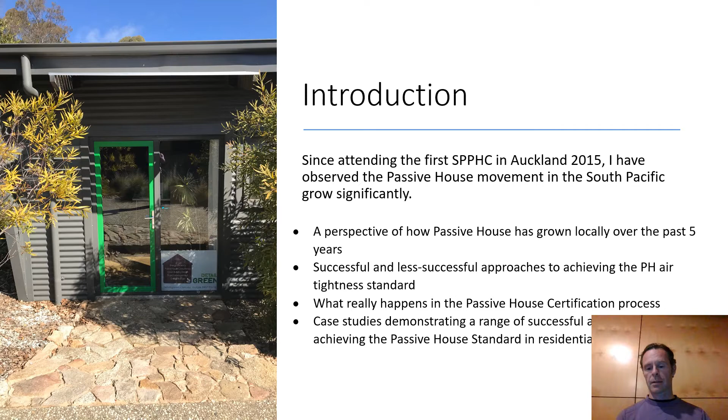What really happens in residential passive house certification, and that's really just a very brief overview because a lot of people are a little bit unclear on what we do. And also, I'm going to give you some case studies of some good projects we've been involved in, ones that you may not have heard about through this conference or other media so far.

So 2015, what were we talking about? Back then there were only the first few projects in Australia. The first couple that I was involved in, the picture here is of one in Yarra Glen out of Melbourne. Really, we were considering the feasibility. What does a passive house look like in the South Pacific in our climate? How do we deal with bushfires?

How do we build an airtight building? It was such a big challenge for us back then. We're getting much better at it these days. And availability of products, airtight windows, heat recovery ventilation systems that are certified. Does it all really work, and what does that mean for Australia? So what were we talking about back then?

In 2016, this is a slide from my presentation at the 2016 conference. It was about being involved in what was potentially going to be Australia's first Passive House Plus. It ended up being Australia's second Passive House Plus. The location is about 4 hours west of Brisbane on the New South Wales-Queensland border, on the western side of the Great Divide.

I worked in conjunction with Sustainable Building Design on this project. Very simple building, very particular client, wanted an off-grid and fossil fuel-free house. You can see from the PHPP some really impressive numbers there, which is great for an off-grid house. Very minimal heating and cooling required.

So in 2020, how is it going? The picture at the top there shows us the Springdale project and how it looks finished. You can see the PV array in the back corner there. So generally, it's functioning quite well, although we've had a bit of contact over the last 4 years with the owners. There's a couple of things.

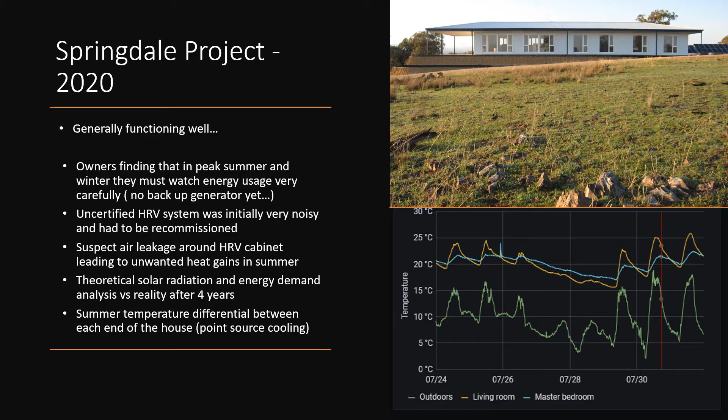So a few numbers for you on growth of passive house in Australia. 2015, when I was doing my first few projects, all our projects were using building certifiers from overseas, from Ireland, Canada, and the Passive House Institute in Germany. 2016, Claire and Jason and I all did the building certifiers course together, and I picked up one project that year as a building certifier as it commenced.

In 2017, the Monash commercial building in Melbourne commenced, and I had 9 certifications on the books by the end of 2017. 2018, I finished my first certification project, and we picked up 13 new projects that year. So things are starting to pick up. In 2019, there's really steady growth. The Fern was completed. Gillies Hall, Monash University also completed. We were at 17 new projects for certification.

This is in 2020, we have on the books at the end of August 23 new projects on the go, which is fantastic. We're really starting to see a rise of EnerPHit projects. Great to see some more of those finished. At the moment, we have 46 projects under certification, 9 completed, and another 5 projects where I've been working as a passive house designer. So things are really taking off.

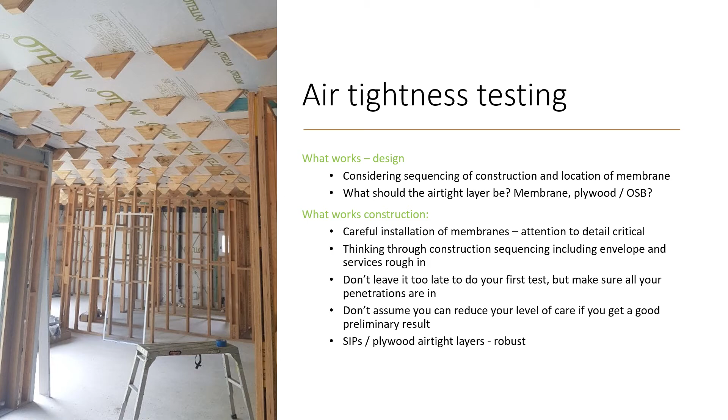Also, on a couple of SIPS projects we've tested, we've found the builders actually really liked it because of the robustness of the OSB compared to a flexible membrane, a little bit more expensive. But if it can be designed and constructed in an airtight manner, like a solid plywood, SIPS, OSB provide a really good airtightness layer.

That's a really interesting finding. So in that project, in the end, they ended up painting the floor with a waterproofing membrane like you would use in a shower or a substrate for a shower, and that fixed the problem.

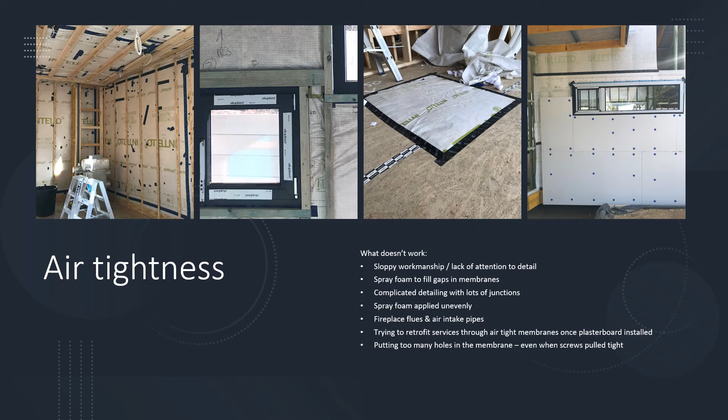Trying to retrofit services through an airtight layer when the building's nearly finished, putting the TV aerial on, not a good idea. Try and do it, think about it and get it done well before your airtight membrane is covered up.

So passive house certification, I'm just going to touch on this briefly, just to give you a sense of what we do in the certification process. So what is it all about? Primarily, it's about quality assurance. The passive house standard requires a certified building to be reviewed by somebody independent, a building certifier, to make sure that the designer hasn't made any obvious mistakes.

This also is a fantastic piece of peace of mind for owners or stakeholders in the project. Just knowing that things have been reviewed and somebody else has had a look over your work is always comforting to know that what you've done is correct. Particularly with something complicated like the PHPP, it's good to have someone look it over. It's very easy to make a mistake, even for those of us who use it every day.

So part of that certification process, particularly for new passive house designers, is providing a bit of tuition on how to enter things correctly into the PHPP. Quite commonly, there's a number of common mistakes that regularly need a bit of tuition. Also, reassurance for passive house designers is a big part of certification.

We get a lot of designers calling us up saying we're just trying to convince our clients to go for certification because we want to make sure that what we've done is correct. We want you to check our work. So that's great, and that's what we're here to do. We're here to help, and here to help you get your passive house project certified.

And I guess the other thing that certification is quite good for is making sure the builder doesn't take any shortcuts. And perhaps that's one of the big differences between a non-certified and a certified building, is that you can be sure that what's on paper has been translated into the finished product. So, a bit of what, why, and how.

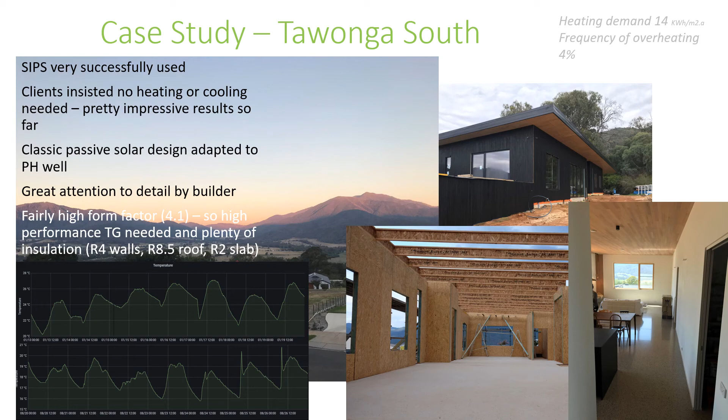The first winters, they're just about through it. And you can see from the charts there that it's got down to about 16 degrees a few times when it's been 5 degrees outside for a couple of days. And in summer, at hottest it got, surprisingly, it was only 27 degrees in a heat wave in January. Triple glazing, quite a lot of insulation there you can see. Fantastic job by builder, his first passive house.

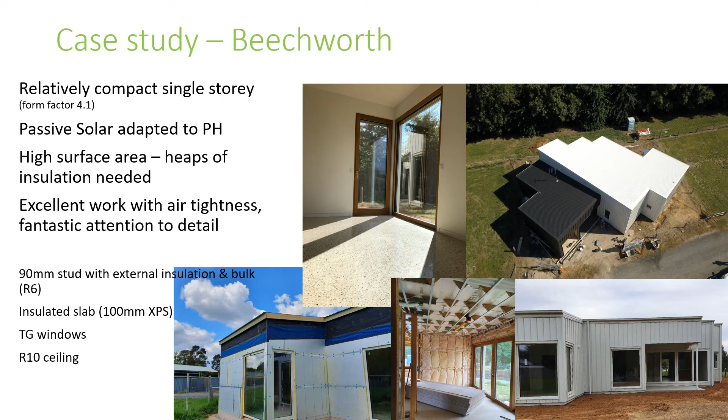High performance triple glazing, fantastic work by the builder on his first passive house building. This uses external insulation on a 90mm stud, fully insulated concrete slab.

A retrofit project in Northcote. This one is a really interesting project that we've been involved in for a number of years now. And I guess quite typical of what is done, certainly in Australia, in renovation projects in sort of inner city, where you've got an old house that may be heritage listed at the front, as this one was, knock down the back of the house and build a brand new house at the back, but retain those front few rooms.

The challenge there is making sure that you can retrofit that existing building to make it airtight. And in this case, they pretty much pulled the whole thing to pieces to insert the airtight layer on the inside of the existing stud-work. Plus, there was a lot of straightening up to be done and fixing. It's so far got very close, 1.1 air changes. So there's talk of a little bit more work to be done, and hopefully this one could be certified as an EnerPHit at some stage in the future.

Project was a first-time project for both the architect and the builder. So quite a challenge. The built-in fireplace was a challenge, as they always are, with an airtight flue. Unfortunately, and I guess a lesson for all of us through this was that during the construction phase, the builder had been given some advice that he could change over the rigid foam insulation for 2 layers of reflective insulation.

And he only told me this after he'd gone ahead and done it on the ground floor. I raised my concerns. We had a WUFI analysis done and proved that it would fail, so it had to be all pulled out and replaced with the proper insulation. So very important to let your builders know, don't change anything without first checking with the Passive House designer.

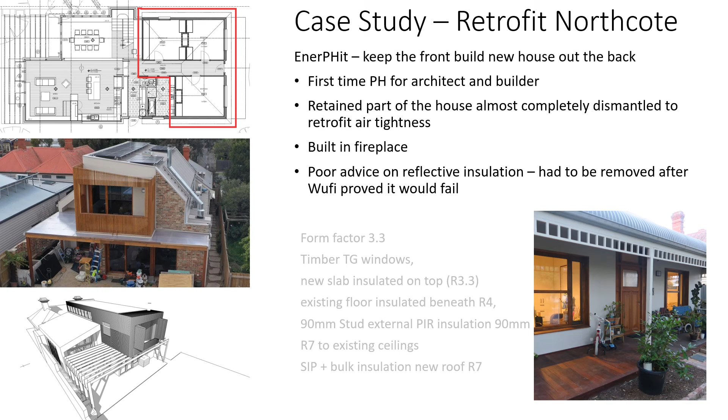Thornleigh project, I know Andy Muller has already spoken about this. I really just wanted to say, Sydney, how easy it is. Fantastic. A mild climate means that with good solar orientation, achieving Passive House is really not too much of a stretch. Obviously, your building must be airtight and thermal bridge free, but you could almost get by with code compliant insulation levels. So I think that's quite exciting. That means we could build, for minimal cost premium, lots of Passive House buildings across Sydney or in that area where we have a mild coastal climate.

Interestingly, dehumidification is starting to become an issue once you get to Sydney and further north. They're doing some great monitoring on this building, so good to see how reality aligns with the technicalities of the Passive House standard. And I think a lot of people who live in Sydney would say that it's not that humid. But we know that our thermal comfort requirements in the Passive House standard are very strict, and it does say that we do need dehumidification at some stages during summer in Sydney.

One of the things about these coastal climates is that winter and summer performance is quite equally balanced. So heating demand, cooling demand are quite similar. And this wasn't a slab on ground project, but for the other Sydney projects where they are slab on ground, insulation generally not required.

Here's a new project of ours, which we've really just sort of commenced on. It's 2 townhouses in Noosa, which is on the Sunshine Coast north of Brisbane.

Starting to get into some really interesting territory in terms of quite a large latent cooling load in summer compared to the sensible load. These two 2-story townhouses, we recently did the NatHERS, so the building code compliance modelling for. The north-facing one got 7.1 stars. The south-facing one just passed with 6.1 stars, but it meets the Passive House heating and cooling demand benchmarks.

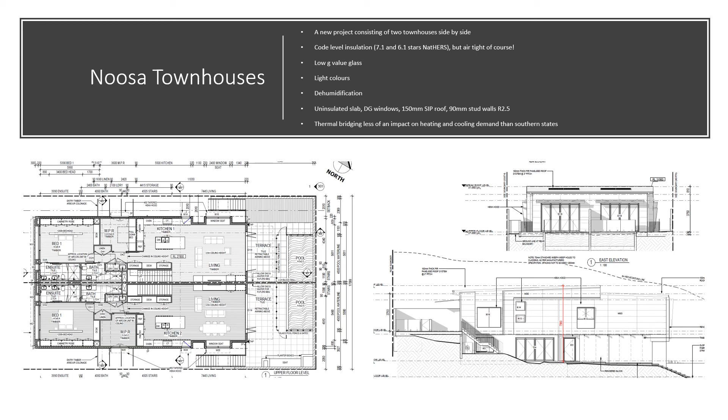A very low G-value glass to try and reduce the overheating. Light colours, dehumidification definitely needed in this climate. Double glazed windows, which is great. We've also found so far that introducing some psi values for some standard thermal bridges, which would make your project quite difficult in Victoria or Canberra, seemingly have not so much impact in a much milder climate. So once again, I'm sure there will be other challenges with dehumidification, but the thermal envelope actually gets pretty easy in these sort of coastal climates. Great to see these ones get built over the next 12 to 18 months.

Here's another interesting one, West Wyalong. This is a project of ours which is just about to start construction. You can see the little red dot there is pretty much west of Sydney. It's about a 3 hour northwest drive of Canberra on the western side of the Great Divide, just before Australia gets really hot and dry. It's sort of near Dubbo, for those of you who don't know that area. It has cool nights but very hot days in summer.

These clients came to us with a concept design which we've drawn up. It's got good solar orientation, and we can get this to comply with the Passive House standard without too much difficulty, although it's quite interesting that even though it's hot, we're starting to get to the point where we need to increase the performance of the thermal envelope. Cold nights, really hot days. It does require insulation under the slab to try and keep that heat in during winter. Very low humidity in summer.

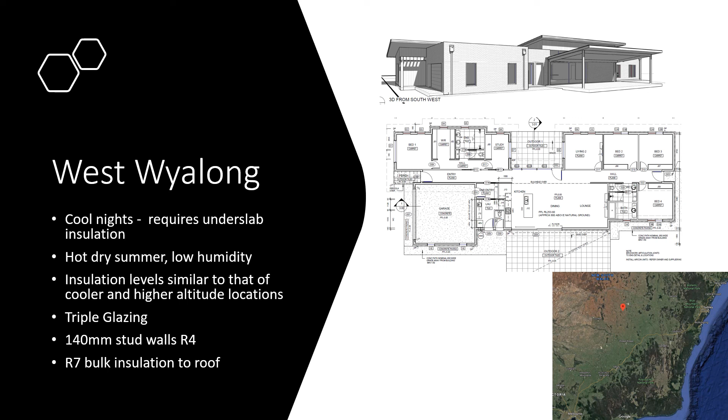So we've had to go to triple glazing, interestingly, to keep the heat in overnight. And also with a relatively low G value to try and stop too much overheating in summer. 140mm stud walls, which is pretty standard for a Passive House in southern Australia, and R7 insulation in the roof. So nothing too extreme, but it's been quite an interesting project, and it'll be great to see this one get built.

So a bit of a summary for my talk here. Our mild climate does allow quite a lot of design flexibility, particularly in the coastal regions from Perth around to Brisbane. Some comments from me standing back and looking at the projects as a building certifier. I think certainly our designers need to do a little bit of adaptive work to really make passive houses as cost effective as possible. And one of the key things there is smaller windows. We love big windows, but as anyone who's been through a few projects will realize, big windows equals lots of overheating, and also they're very, very expensive. So slightly smaller windows is a good thing. More compact building forms, once again, same sort of thing. It's a historical way we've designed buildings, but the more compact they are, the easier they are to get there.

And certainly don't throw away your passive design principles, no matter what somebody tells you. A good solar orientation makes it much easier regardless of the climate. External shading devices are an absolute must. Anywhere where it gets hot, you need to be able to keep that summer sun out, and horizontal eaves and awnings only do a certain amount. So vertical external shading devices are very common in passive houses. Quality windows, absolutely. Interesting that a lot of designers really don't understand what a great investment quality windows are.

And keeping it simple: if you want to build a cost-effective passive house, the simpler it is, the easier it's going to be, both in terms of construction and cost. So it's really striking a balance, for a lot of our architects and designers, between providing an architectural statement and a building with high performance. So just in summary, the coastal climates around the southern part of the country need minimal additional insulation to reach passive house, which is really great. Hopefully we see a lot more buildings in these areas. In the colder, more inland areas, passive solar design principles and a compact building form are really important to keep that right. And always take care with the airtight membranes. There's no room for error in the airtightness requirements.